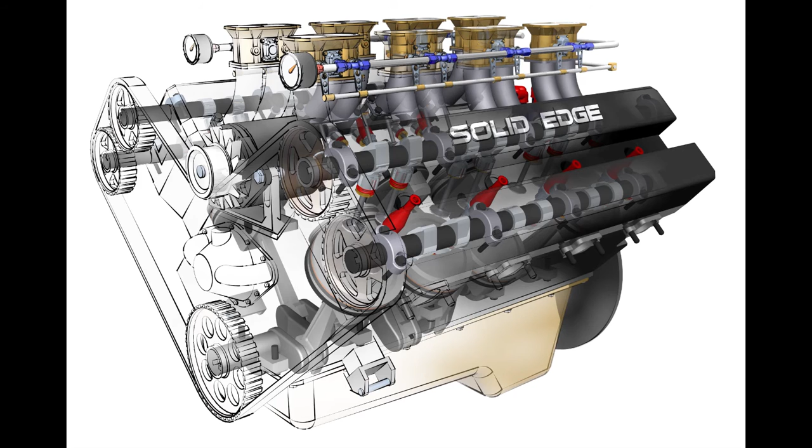3D product development often involves working in complex, crowded assemblies containing lots of duplicate parts with unique functions. Discerning one component from its neighbors is not always easy, as spatial and functional relationships can be obscured. But Solid Edge ST9 delivers efficient tools to get the job done faster.

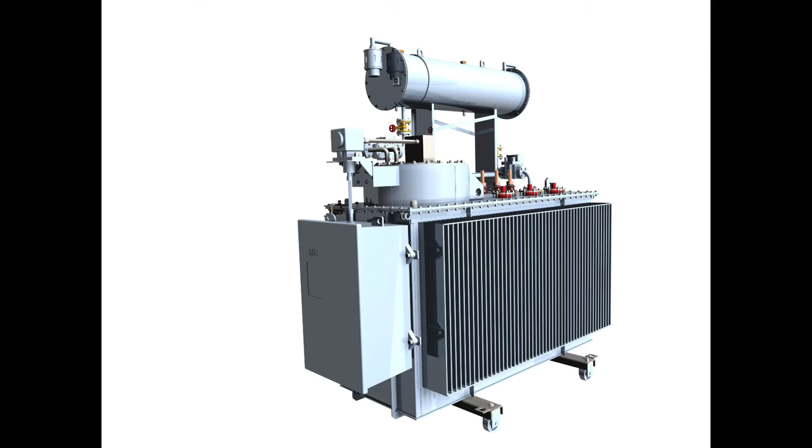In this demonstration, we'll focus on various systems and components of the Zumex Soul automatic juicer to showcase several exciting ST9 enhancements.

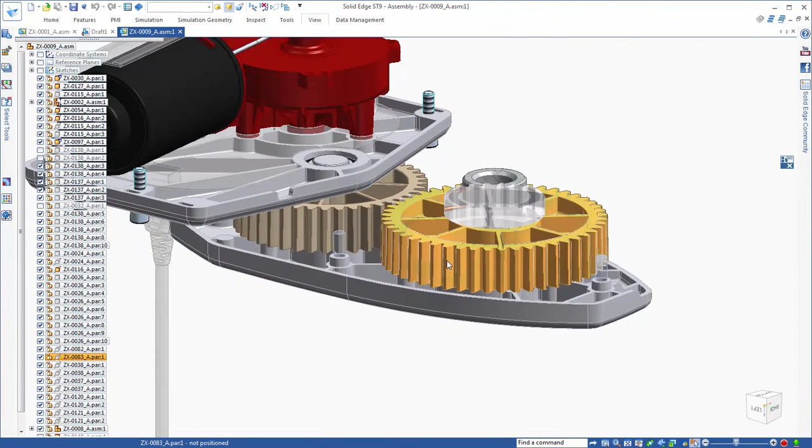First, we'll open the motor assembly and use the new graphic display toggle to help declutter the display. This command makes surrounding bodies translucent, emphasizing the components we wish to focus on.

The new Assembly Relationship Manager is an intuitive Pathfinder-like dialog containing the entire assembly's relationships. We'll use its various sorting methods and filters based on relationship type, specific component name, and status to interrogate and take control of spatial and functional relationships.

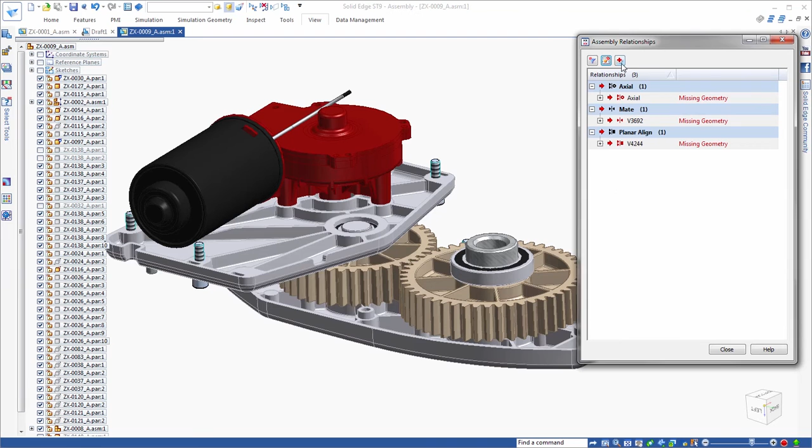Watch as we filter for relationships with missing geometry. We can identify and repair out-of-date and broken relationships with this powerful tool.

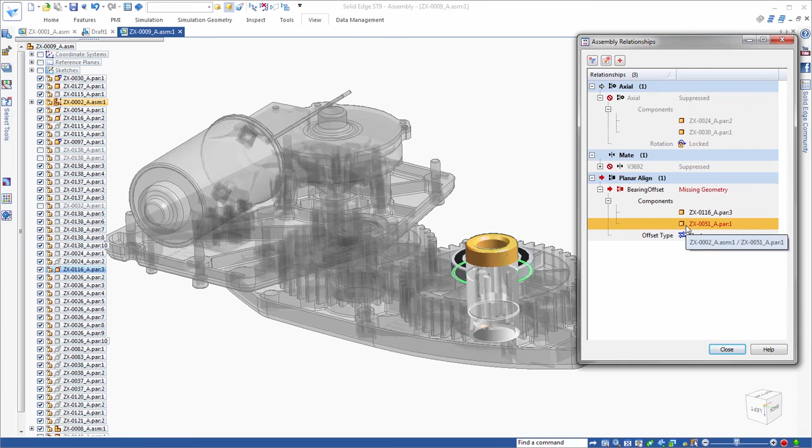Fixing broken relationships is a snap. Watch as we unsuppress this last relationship and rename the variable bearing offset. Double-clicking on bearing offset puts us in the relationship editor where we can quickly fix the problem. In this case, we had to identify a different face for an offset.

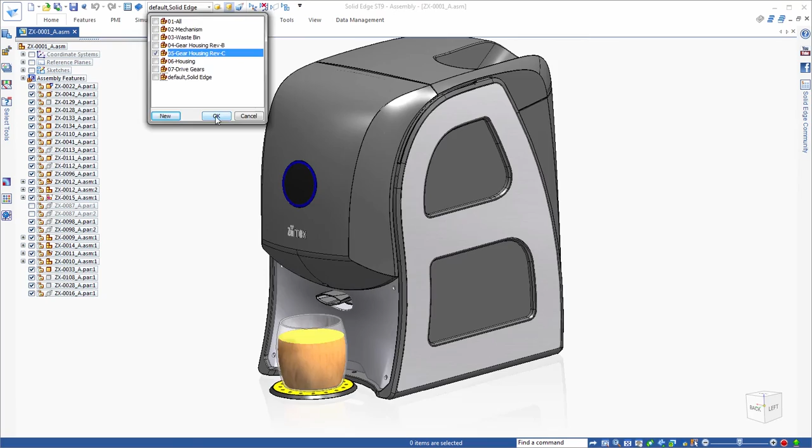Before we look at some of the numerous patterning enhancements in ST9, we'll use the new Isolate display option to quickly focus on a desired subset of bodies. With one click, this handy toggle hides everything but the housing part.

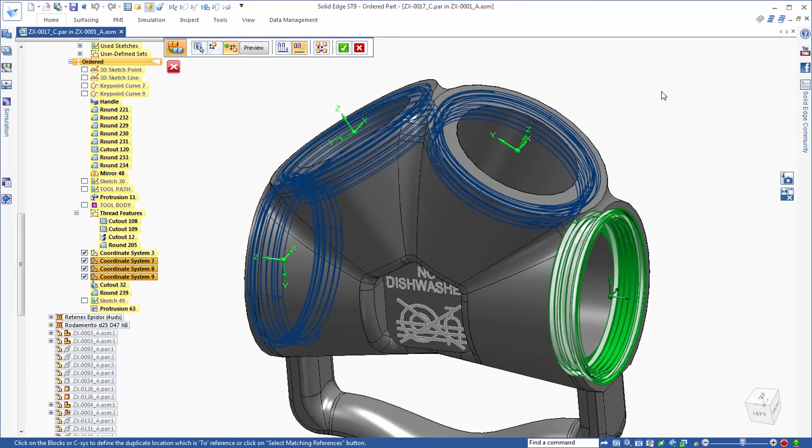When we in-place activate this housing, notice the first bore contains a thread that needs to be duplicated across the other bores. We'll simply select the thread feature and use Duplicate to create threads across the other bores, using coordinate systems for placement. To exit the Isolate mode, we'll select the on-screen Restore option to get back where we started.

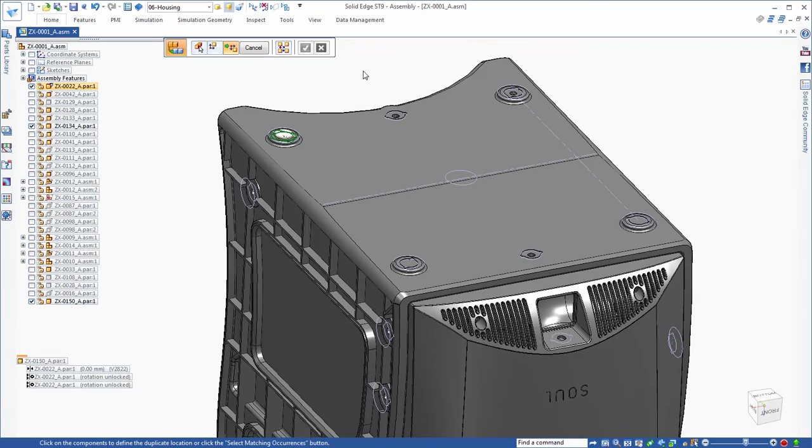At the assembly level, the enhanced Duplicate Component command uses block sketches within part components. We'll duplicate this footpad part across the top and front housing pieces by identifying the same sketches used to create the features at the part level. Notice we're no longer limited to patterning in a single plane.

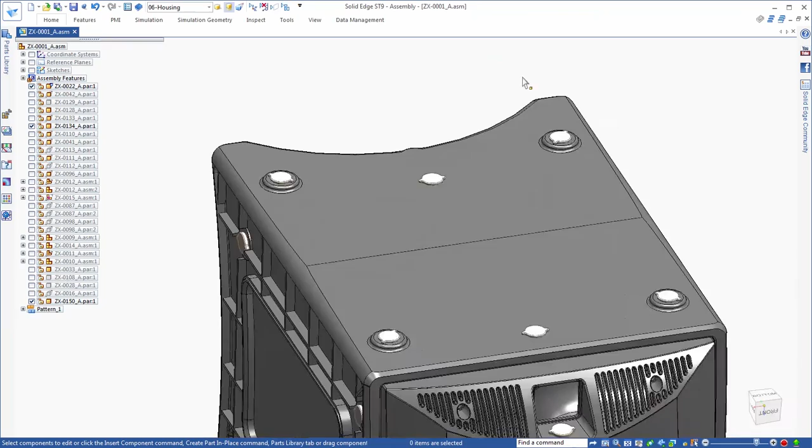Finally, realizing this hole is too close to the edge, we'll change its location at the part level. After the change, we can go back to the top-level assembly and see the pad update, further emphasizing the ease of part modifications within an assembly context.

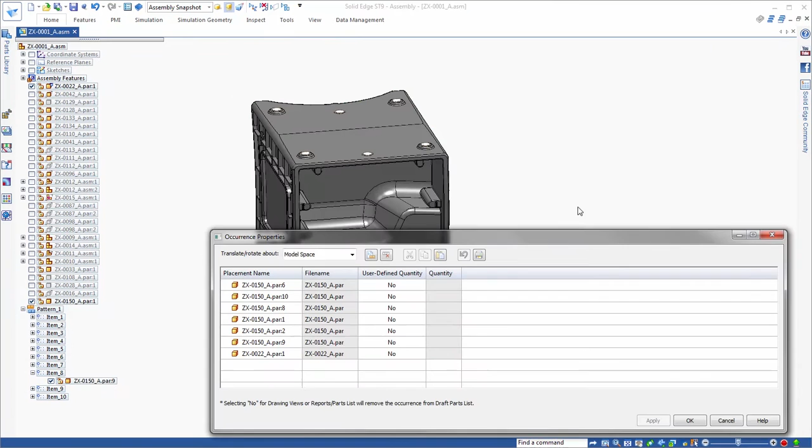Just because a component is duplicated in an assembly doesn't mean it serves the same function in all places. Unique properties of each occurrence can be defined with non-graphic data, such as notes, assembly instructions, and even maintenance procedures.

Here, we duplicated a single pad part across multiple locations on the bottom of this base part, yet each occurrence has a different purpose. We'll read custom information into the occurrence properties of an assembly. In this case, reference ID and type designate each occurrence's category as either a foot pad, foot plug, or plug.

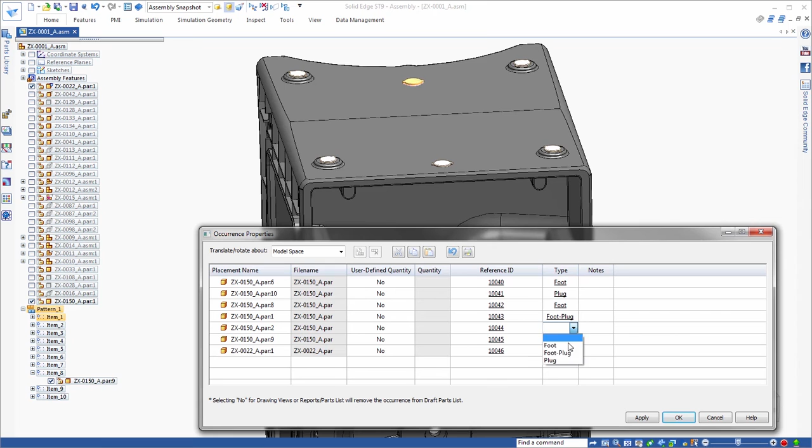Finally, the notes property provides a place to add information such as assembly instructions. Note the user can define any custom property.

Another huge benefit comes from the ability to create and save custom property queries. This facilitates search and location of specific components within the product structure.

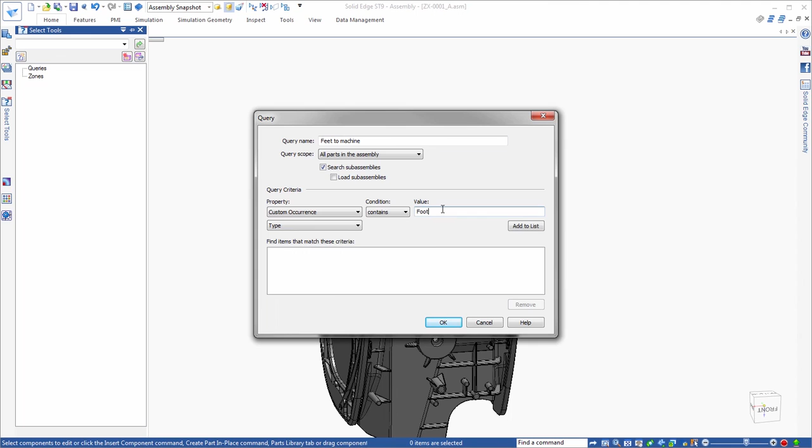We can select any of the properties that were read into the assembly. For this example, we'll use type. Once the query is set up, double-click and those components are quickly located. That was easy.

Finally, we'll use these added properties in a drawing. We'll place a saved view on the drawing sheet, then supplement that with a parts list that includes the custom properties and the information specific to each occurrence.

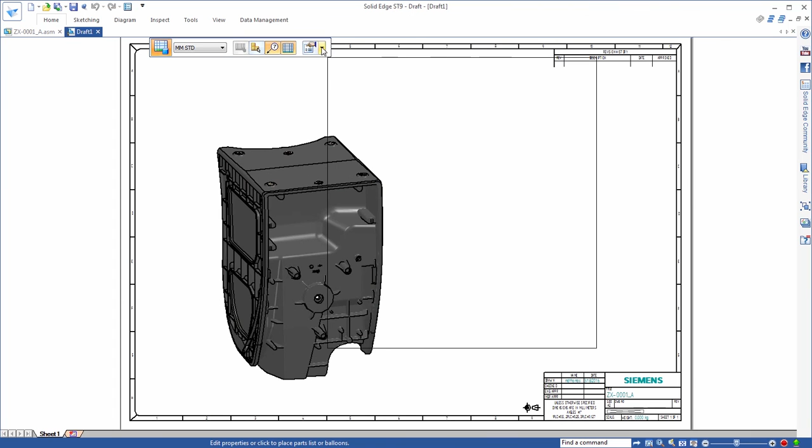Notice the parts list shows all 6 occurrences, each having its own reference ID and type. Also, notice the assembly information included with the notes property.

We've just showcased a number of powerful ST9 assembly modeling tools that are sure to increase productivity and shorten time to market.